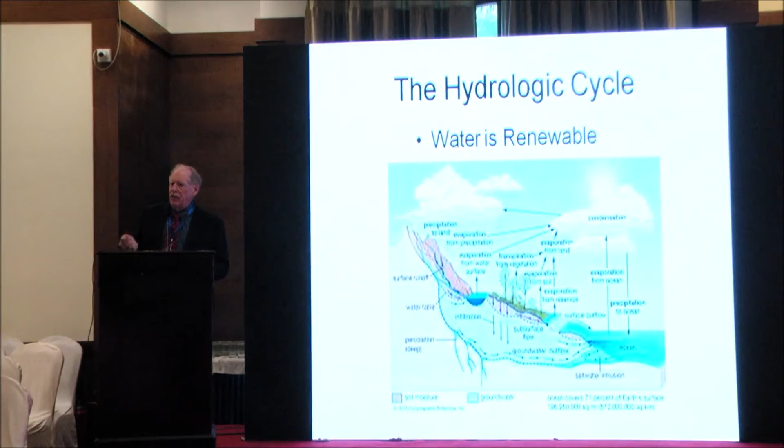But the good news about water is that it is a renewable resource. And it's not just the 1 drop that is renewable, it's the 98 drops that are not frozen in the seas that replenish our Earth. So water has always been a renewable resource, and that gives us a terrific advantage. We must always think of water as being renewed. There's no such thing as new water. The water has been reused for millennia.

But what happens when we think about planning for the future is that we must take a look at how limited the water resource is relative to our growth. If we have 6 million new people added to the earth every month, we must manage our water resources, our land resources, and our air resources in a smarter way. We must think in terms of cycles: the water cycle, the carbon cycle, the nutrient cycle. If we think of these things as cycles, we will start to integrate our thoughts with respect to land, water, and air and begin to manage them in an integrated way.

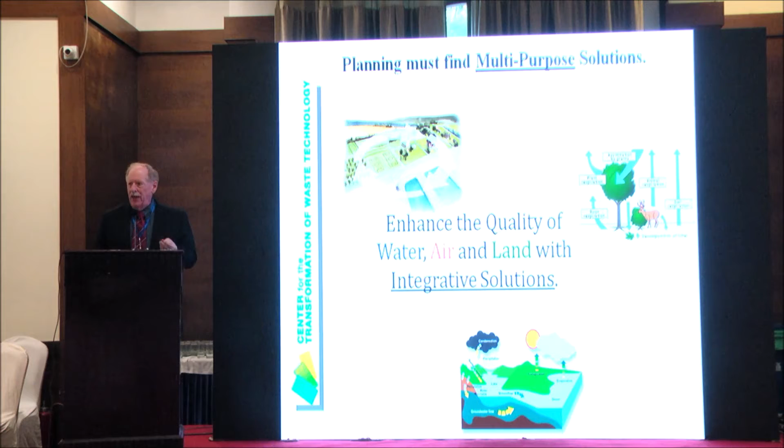And when we manage them in an integrated way, what happens to our thought process when it comes to wastewater? Well, we turn wastewater upside down and say, wait a minute, wastewater is just nothing more than a pollutant that's in the wrong place. If it were in the right place, it would be a resource. So we coined the phrase, pollutants are resources out of place. The question is, how do you get them back to the right place?

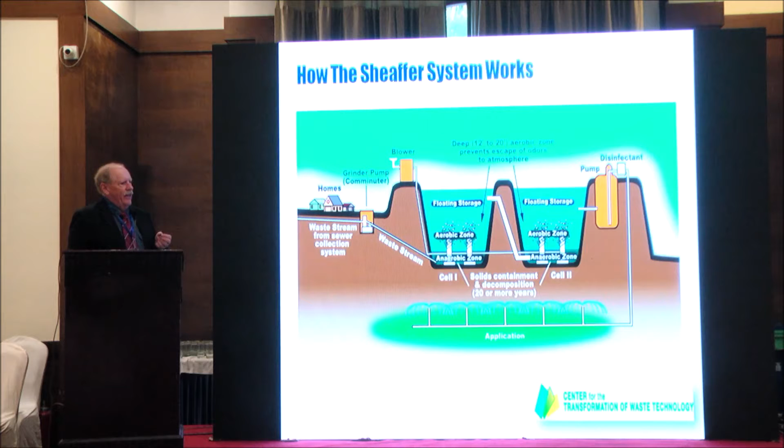That's what my dear colleague and late mentor, Dr. Jack Sheaffer, started working on. He was a floodplain management expert, and he used to go into communities after a flooding and found that the sewage treatment plant was the first thing that became flooded because it was located down by the river. And you know what? It was the last thing that came back on as the flood receded. So the wastewater treatment plant operated was shut down for the longest period of time.

And Dr. Sheaffer would ask the people, especially the people in Tennessee and other Tennessee Valley areas that were part of this early research in floodplain management, why did you put your wastewater treatment plant down by the river? Don't you know it gets flooded there? And they would say, well, Dr. Sheaffer, you might have got a degree from the University of Chicago, but don't you know that water flows downhill?

We have to have it down there because that's where the water flows, and we have to treat it down there. Well, Dr. Sheaffer doesn't just say, okay, that's fine. He said, what if there's a different way of thinking about what to do with the water? What if we turned it upside down? And that's what he started doing with respect to water quality, turning things upside down.

What he found was if you leave the floodplain as open space, vegetated open space, and don't put your sewage treatment plant there but put it high and dry so it doesn't get flooded, then you can begin to think about irrigating the floodplain with reclaimed water. From that simple thought, he started reinventing wastewater reclamation and reuse. That's what this schematic is all about.

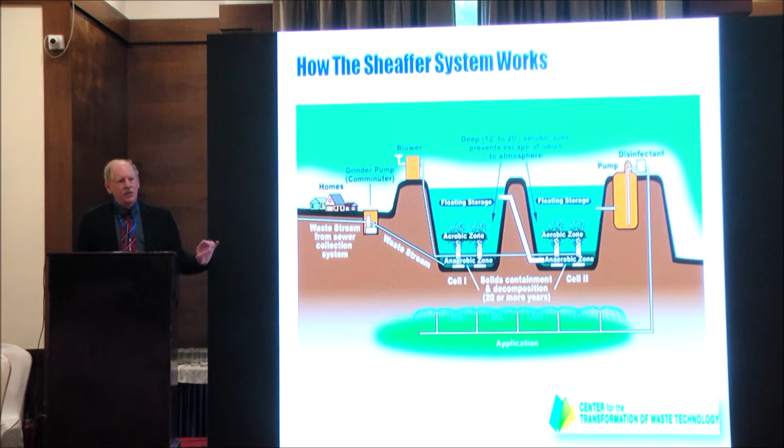I'm not going to go into the details of this system, but one of the great factors of a successful system is its simplicity. Dr. Sheaffer worked really hard, and all of us helped him work really hard to make this a simple system. We have essentially three moving parts: we have a grinder pump to bring the water in.

We have to put the water under pressure because we send it to the bottom of a deep lagoon. We have an air blower that injects air, and this is an extended aeration system - that's our wastewater system, extended aeration. And we have an irrigation pump at the end to take the water out and put it on the fields. So essentially three moving parts. We make it as simple as possible.

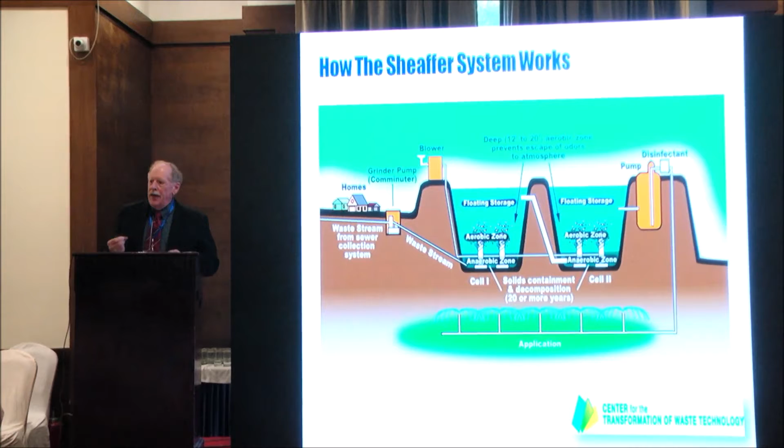The idea is that if you aerate for an extended period of time, you will benefit from the natural treatment processes of the aerobic and anaerobic system that we set up. At the bottom of the pond, below the submerged aerators, we create an anaerobic zone where the solids are digested. That means we don't have any sludge to manage at the end of the train - we manage sludge first, not last.

We also extend the concept of aeration. We don't think of it in terms of hours, we don't even think of it in terms of days - we think of it in terms of weeks. We give it weeks of aeration. What that does is it creates a biological system that is very simple and very effective. And that's the basis of what happened with the whole approach of wastewater treatment in a decentralized system.

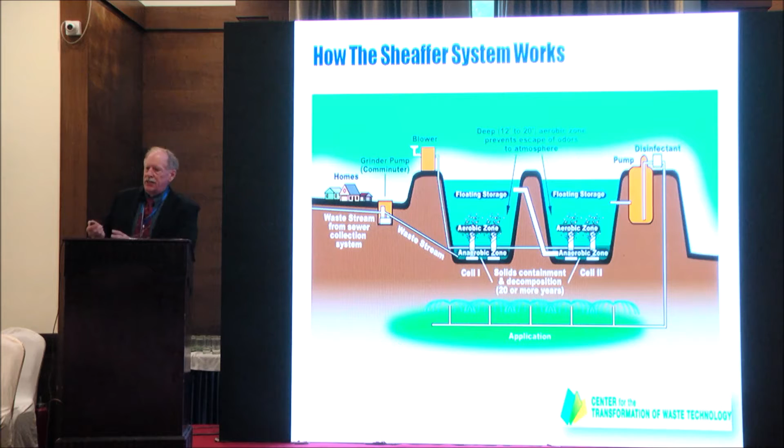But we didn't start out in a decentralized way. We started out with a massive program. In 1973, in the United States, Dr. Sheaffer had just finished being the science advisor to the U.S. Department of the Army. He was essentially a major general, and he helped pass the Clean Water Act in 1972.

The United States instituted its U.S. EPA, the Environmental Protection Agency, in 1970. And in 1973, the Muskegon County wastewater system was the first ever project funded by the U.S. EPA - it's U.S. EPA project number 1. The reason they chose it was because it represents a departure from conventional thought. It involves the irrigation of 42 million gallons a day of water, a population equivalent of almost 500,000 people, 420,000 population equivalent.

What happened was, this is a site on the Great Lakes, on the beautiful Lake Michigan, and very simply, all of these treatment plants from the cities and a huge amount of industry were polluting Muskegon Lake, which was a big lake feeding into Lake Michigan.

What Jack Sheaffer decided to do was turn them all off. Bring all the water out away from the lake, treat it in a pre-treatment system, and store it in 2 great big lagoons. Then irrigate 8,000 acres, roughly 3,000 hectares of land. That was essentially an inland sand dune, not very productive farmland.

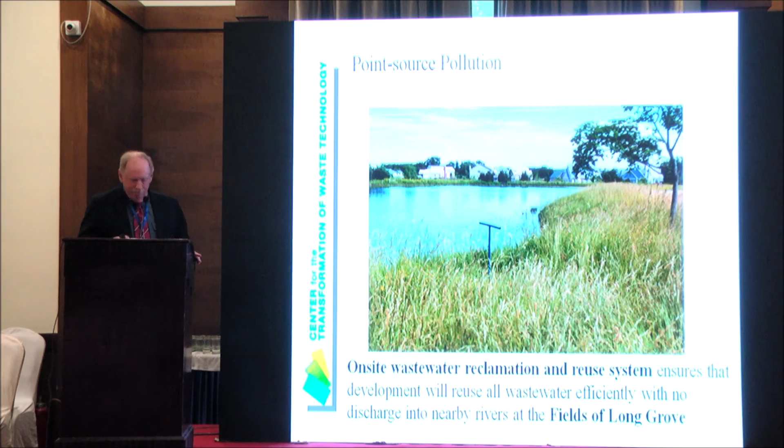and it irrigates the woods right next to it, and it can irrigate all year long, because you can irrigate in the woods during the wintertime. So we can irrigate cropland and be productive, and we can irrigate golf courses and be beautiful, and we can irrigate forests and have a lovely resource for our community.

So when we think about planning, we must think more than just water. We must think land, we must think air, we must think community needs, we must think what our children need. And so we must go through the process. We must think about how to treat the point source pollution in a lake that fits the community. We must think about non-point source pollution in swales that convey the water slowly off the site, and during the flood store the water so that your neighbor downstream is not flooded.

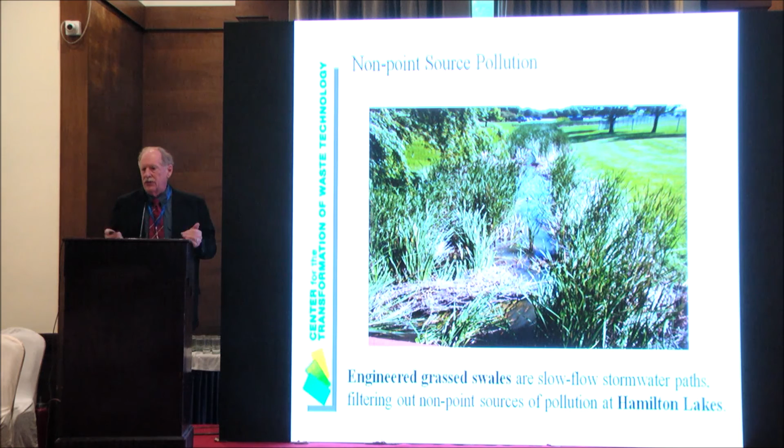We can store the water on a golf course. This is an actual flood on one of the golf courses that we built, and it's storing the water. We can store the water in a big lake. Or we can use the water as a farm. This is a farm that's very interesting because it's a retirement community. It's an affordable retirement community. Everybody there gets a very inexpensive, well-built modular home. You might call it a trailer, and it's an area where keeping costs low is critical.

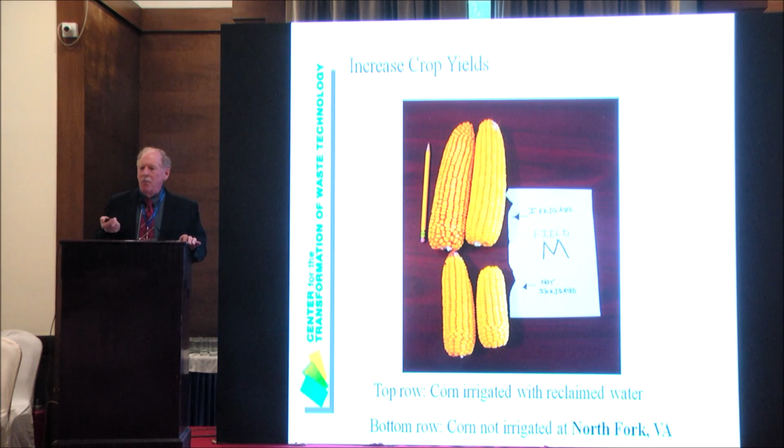So they decided to go with a farm because they can sell the hay that they grow and the other crops, and offset the cost of their wastewater treatment system and keep the cost of water low for the elderly residents of their community. And we always brag about the fact that if you irrigate with reclaimed water, you're recycling nutrients. And so we increase productivity, and we get more agricultural benefits. And we sequester carbon. And we create greenways. And we build better communities.

Well, in our systems, aeration, extended aeration is everything. The ducks come to a pond that's being aerated or that has been aerated. A fully aerated pond will attract a duck. A duck likes to bobble in the water when it's being aerated. If you look out your window and you say, "Where are the ducks? There are no ducks here," you had better check your aerator because it's probably off. And so our duck is our assistant aeration operator. All we have to do is say, the ducks are there, the aeration is working. The ducks aren't there, go fix it.

So from a low-tech point of view, you don't need instruments, you don't need meters, you don't need anything like that. If you pay attention to the fact that the fish told us how successful Muskegon was, and the ducks tell us how successful our aeration was. On that basis, I will leave you with a thought. Meeting the challenges of 600,000 villages in India, manage the environment in harmony with nature, and the project will be successful. And with that, I will leave you.